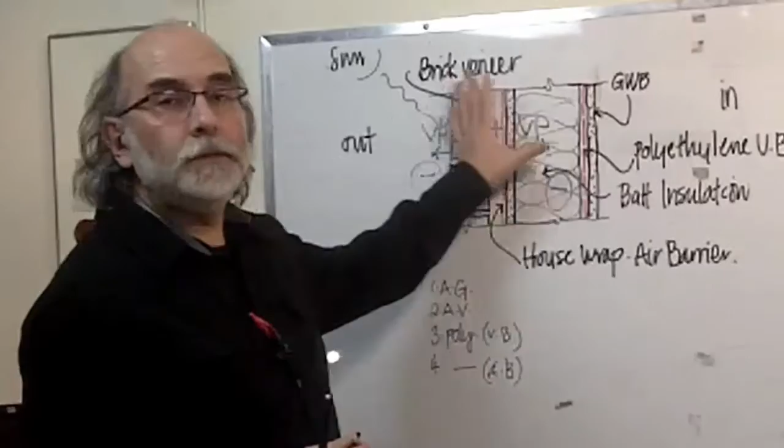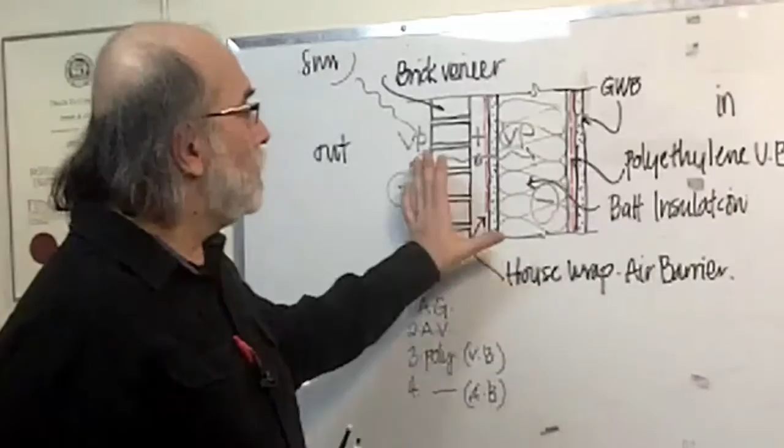In this detail that I've just sketched, it shows a typical wall section of a building, mostly residential, but it could also apply very well to a commercial building. In this cross section of a typical wall, we see a brick veneer, an air gap.

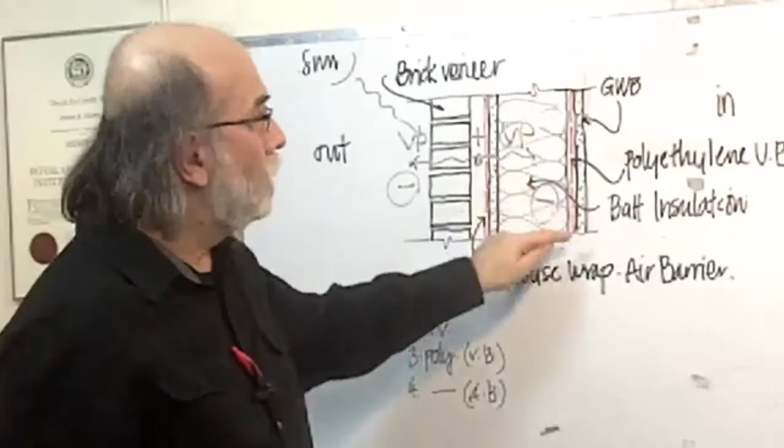A house wrap, what we call a felt layer or sheets, then sheathing, which is the boards that wrap or enclose the building, and then the metal studs or wood studs which house the batt insulation. Then we have another red vapor barrier, and then the gypsum wallboard, or the drywall.

Now what's wrong with this? I mean, this is a common practice, but I have a word here about this common practice that could turn into a dangerous situation in certain scenarios.

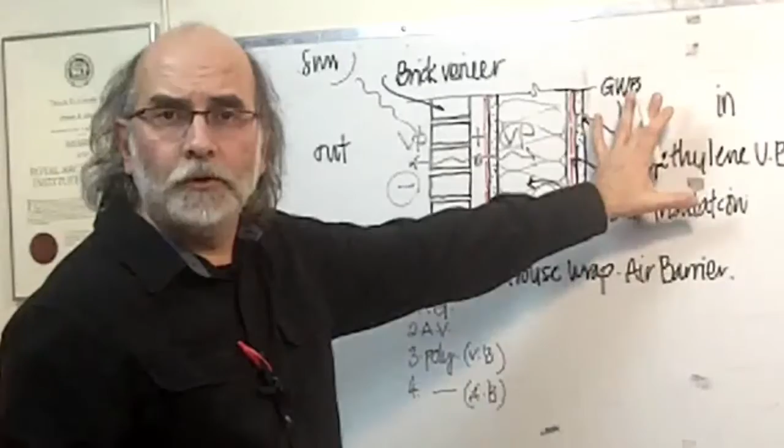Now imagine the sun is shining and the temperature is normal, let's say 20 degrees Celsius inside, and the sun is shining and heating the brick veneer. When it heats the brick veneer, the air inside this air gap gets heated up a little more than the outside and the inside, because this is obviously a controlled environment, but it could drop to cooler levels or go higher depending on the general conditions around the building.

But this gap becomes hot, and considering the vapor inside the air, this would create higher vapor pressure here than the vapor pressure outside and inside.

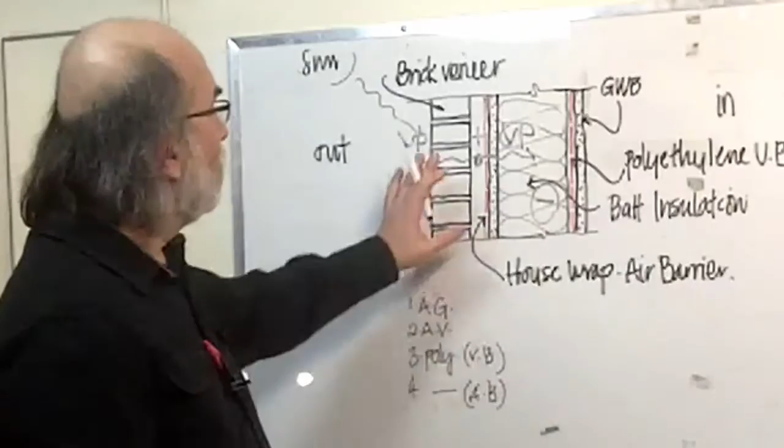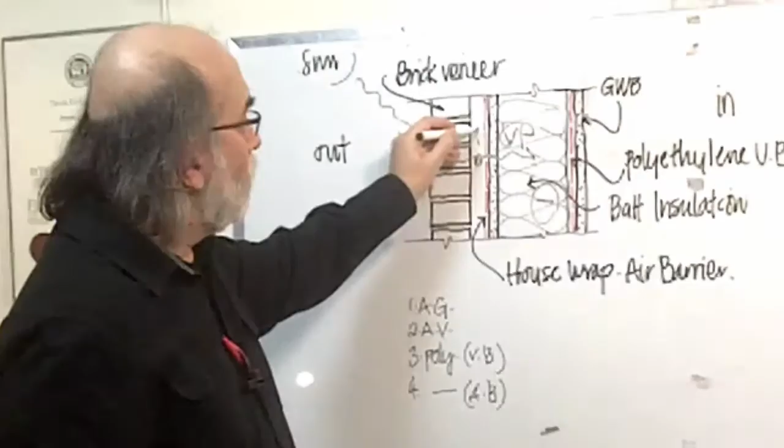Now the vapor moves when there is a vapor pressure differential. When you have a higher vapor pressure area and a low vapor pressure area, the vapor tends to move to the lower pressures. So in this scenario, when this gap is not ventilated enough and keeps it enclosed or entrapped, the vapor pressure here will definitely travel to the outside and to the inside.

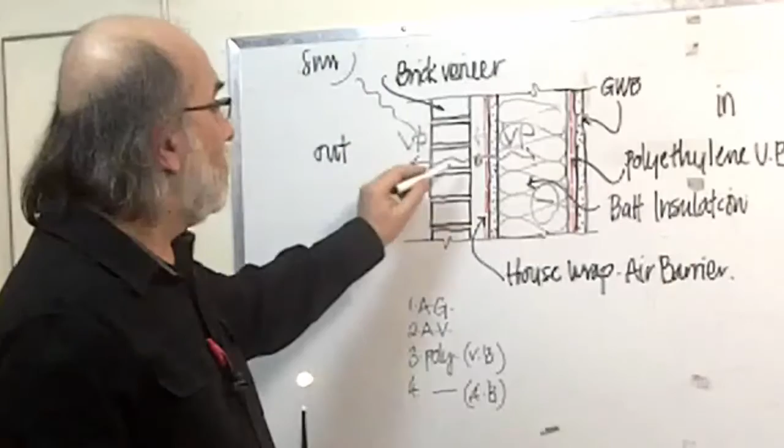Now this might have different outcomes when it goes through the brick veneer, but the most crucial part is when the vapor travels inward into the house.

And by all means, we would like to prevent the house from getting moisture that we cannot control, or it might sneak behind the wall and cause damage to the wall.

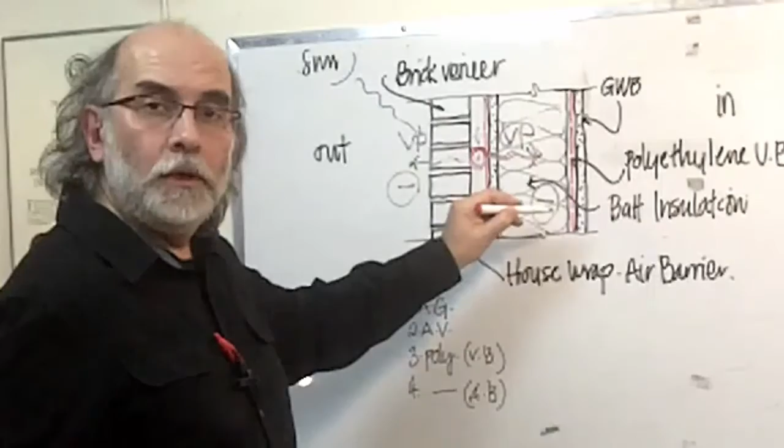Now when the vapor travels from this air gap into the inside of the wall, it could face a cold surface if there is an AC here, air conditioning. So these areas would be colder, which may cause condensation here of the vapor, and that will cause accumulation of vapor inside the wall assembly here, which has, of course, the batt insulation.

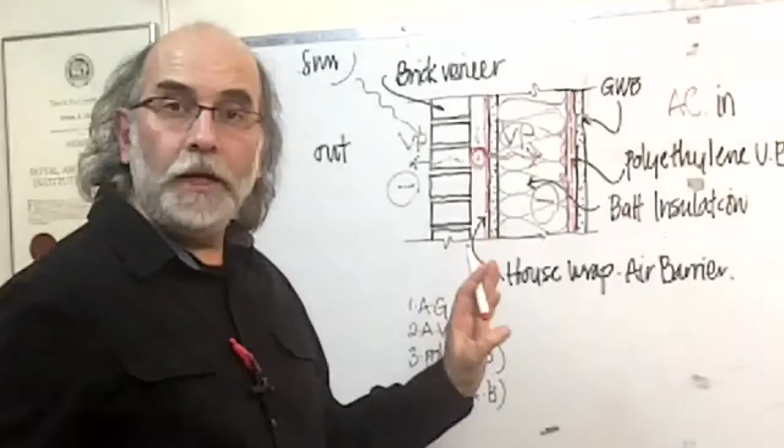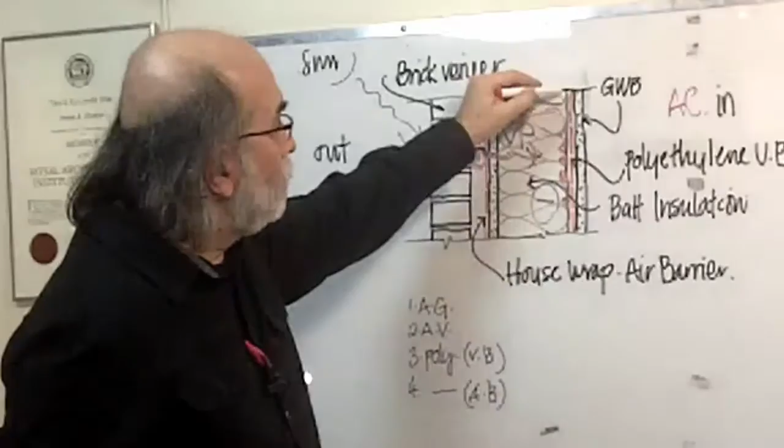The other danger, or the most crucial mistake that many of us do when building a wall, is to put the vapor barrier, which is a polyethylene, the 6 mil polyethylene vapor barrier, inside while this scenario is happening. Then the vapor will travel and there is nowhere to go from there. It is entrapped inside the wall assembly, and this is a dangerous situation.

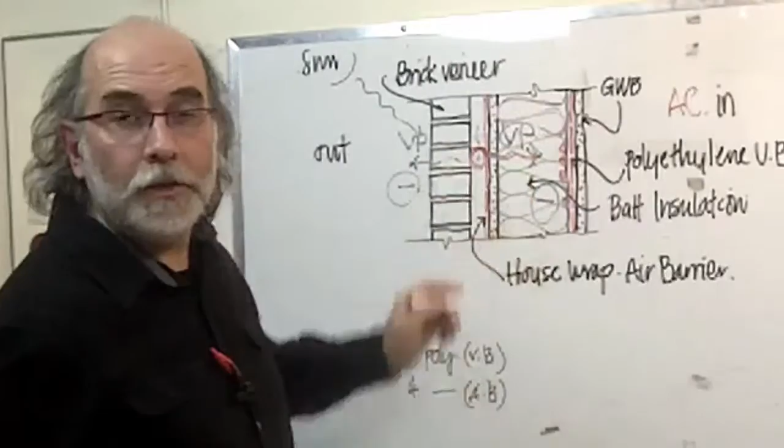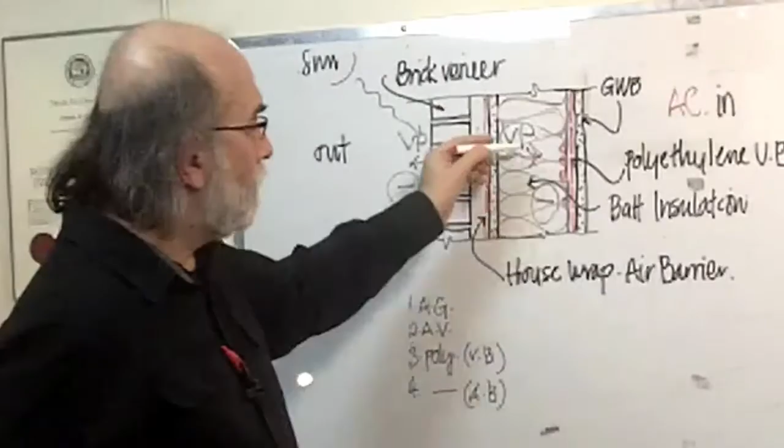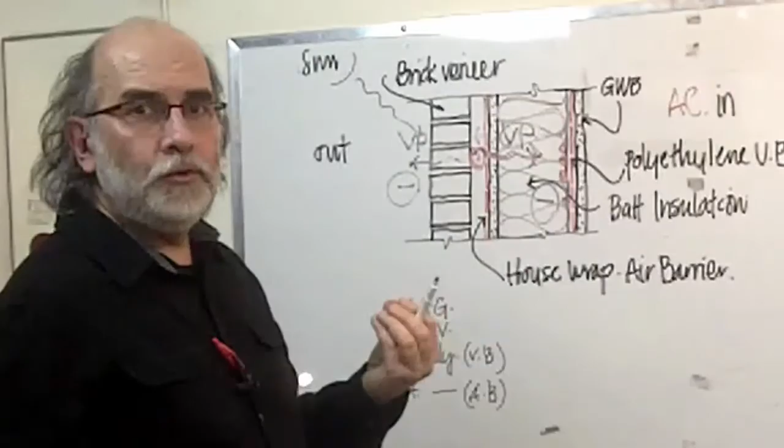Now what happens is that the vapor stays here. It cannot go back because of the vapor pressure differential. It stays there, and as I said, when it faces a cold surface, then it tends to accumulate as water drops. This causes the batt insulation, which is a fibrous material, to absorb moisture until it's soaked, especially at the bottom of the assembly, causing all sorts of problems.

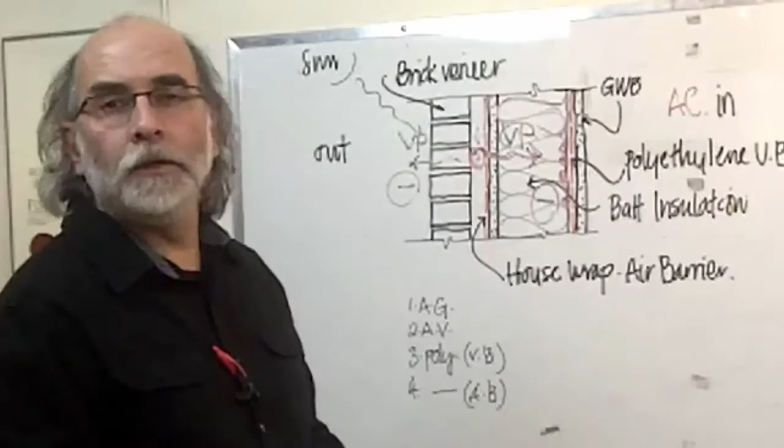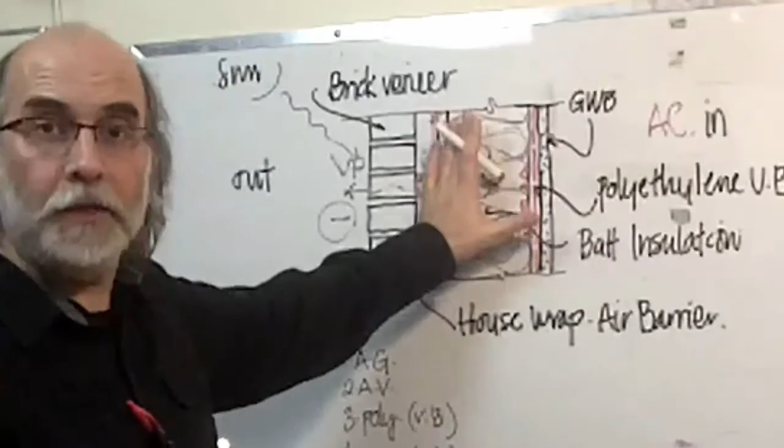Structural problems, of course, decay of the base plate or the wood studs themselves. In addition to the efficiency of the batt insulation itself, as thermal insulation, and also it can cause, over time, if this is repeated enough, mold to be created here, because mold loves moisture and heat and darkness.

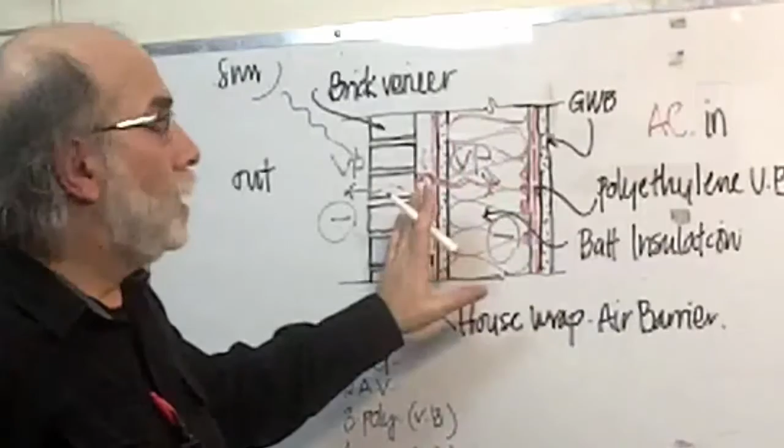So when the mold happens, then this wall assembly becomes a source of sickness, a source of disease, illnesses for the residents inside the building.

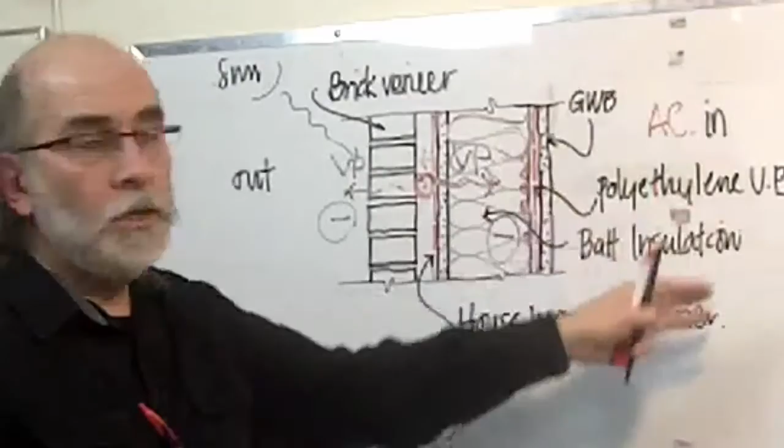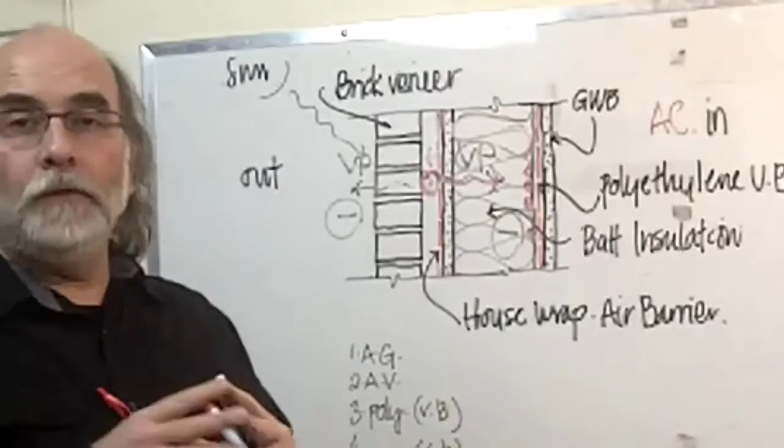So this little detail, which is called a common practice, could be a source of all kinds of problems if attention is not paid to the layering of the wall assembly and to the permeability of this vapor barrier versus the permeability of the air barrier, and I'm talking about these two red layers.

These are crucial points. Even though they might look so technical, they could ruin any beautiful design, any well laid out house or building by making the wrong detailing.

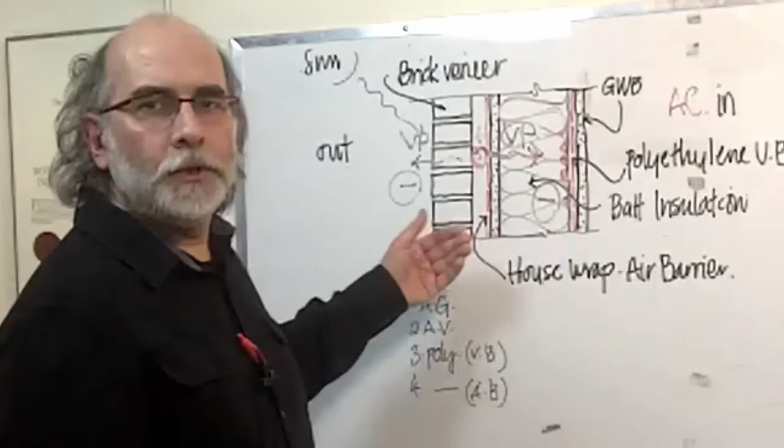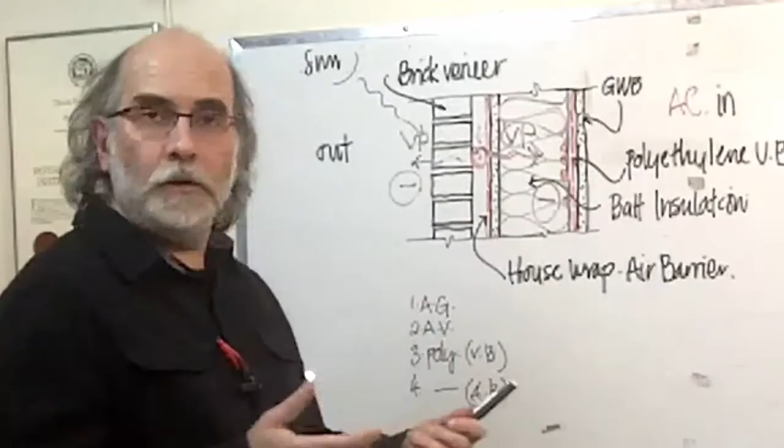And of course this is a generic problem, but around the windows, around the openings, the jambs of doors, there are other problems that could occur, especially when there is an air leakage or there are sockets for electrical sockets, for example, and they are not sealed around that opening, and all sorts of things that could cause the air infiltration or exfiltration through the assembly.

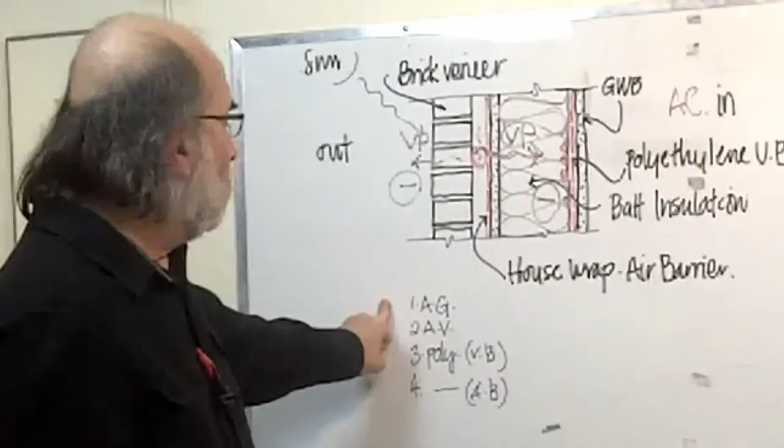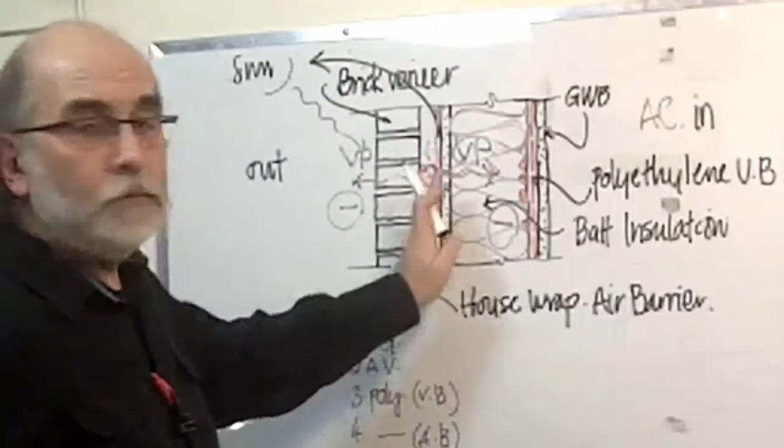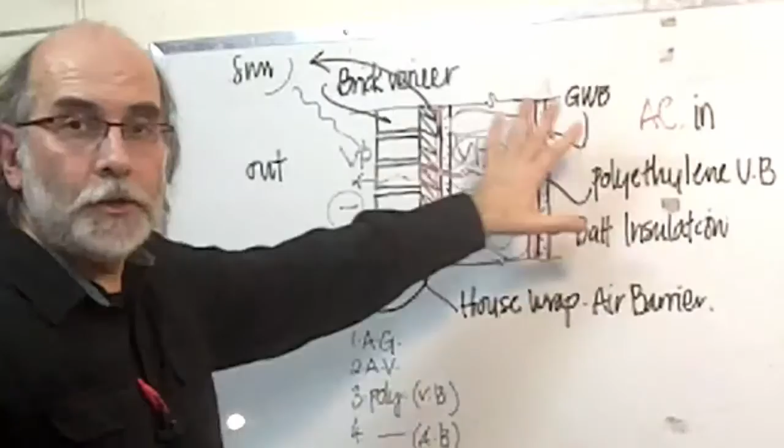Now, to wrap up, we need the air gap to be aired. This is very important. So we need the air to come from below and exit from above, so that we have a well-aired air gap here. This is an air gap, without which, as I said, the temperature here with the moisture would have nowhere to go, so it expands to the lower vapor pressure areas, which tend to be the inside.

We need air ventilation, as I said. So air gap alone is not enough. It has to be well ventilated, and we need to be careful about the poly. This is the common name for the polyethylene. The 6 mil poly, we cannot use it everywhere. We have to be careful, because if there is this situation, this would be a curse, not a solution.

This would be a problem, rather be a solution. Why? Because it entraps the moisture or the vapor inside the wall assembly, causing it to decay over time, of course.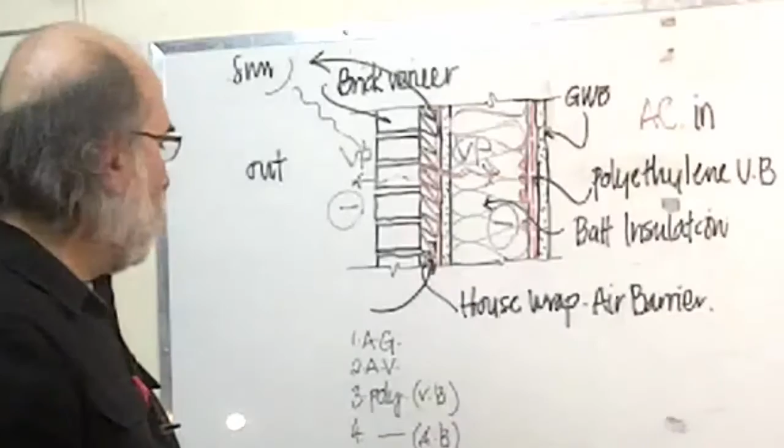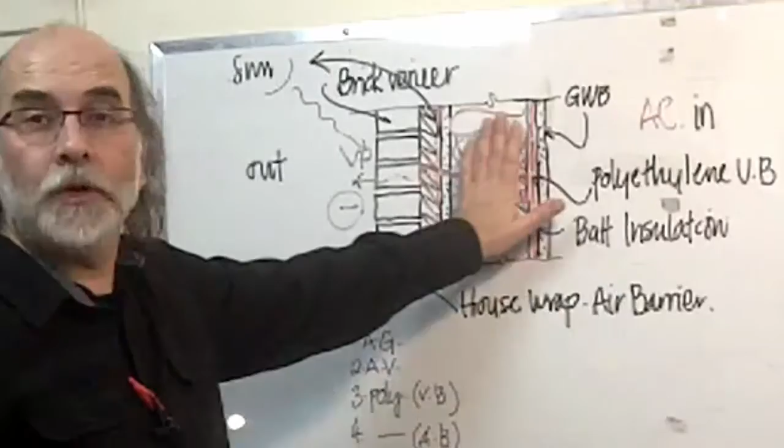The air barrier is also a fourth thing that I would like to draw attention to. We need to make sure that the air barrier is an air barrier, not a vapor barrier, because if it's a vapor barrier, then it will also create a barrier to the vapor entrapped here and would not be able to escape.

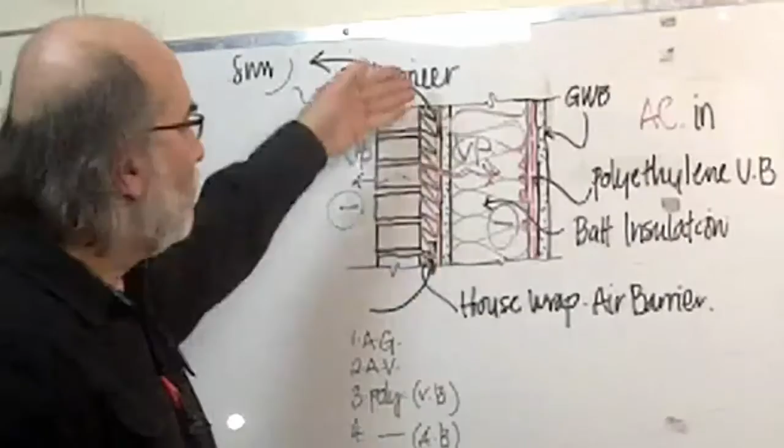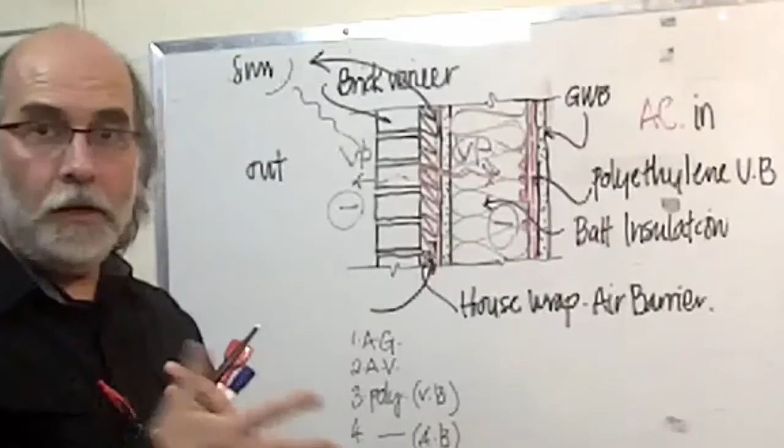So that's why this material's permeability has to be much higher than the polyethylene permeability, which is really minimal. It's a plastic or nylon that really cannot let any vapor through it, while the air barrier is a fabric that prevents the wind from entering the house or the structure, while maintaining the vapor to move freely across that material.